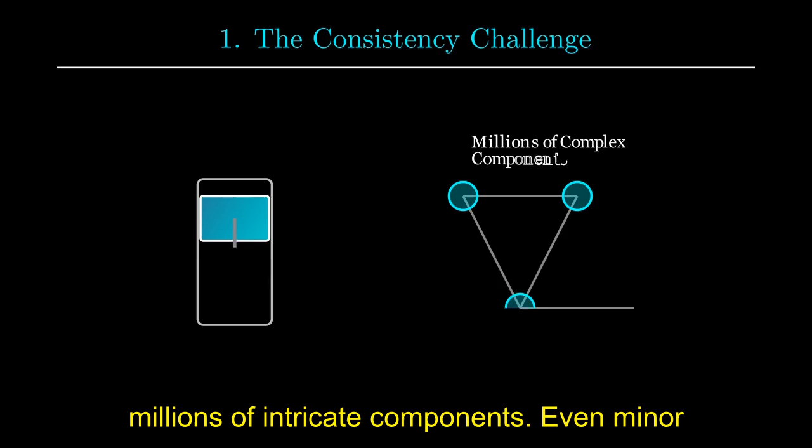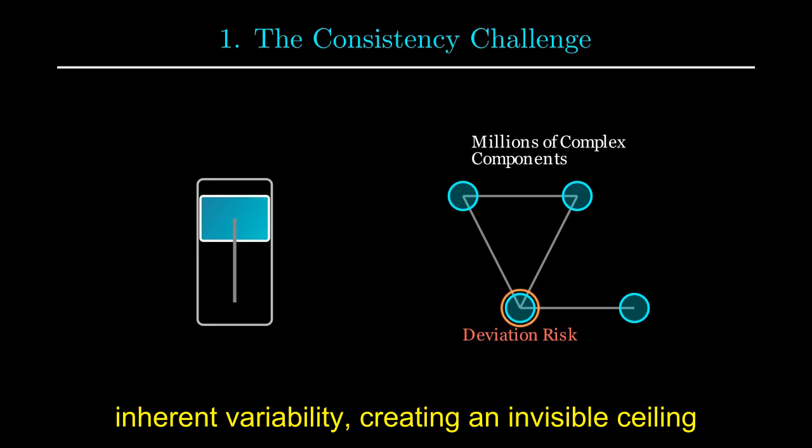Every engine built today faces a fundamental challenge: achieving absolute consistency across millions of intricate components. Even minor deviations can lead to reduced performance, premature wear, and costly failures. The traditional methods, reliant on human inspection and fixed automation, often struggle to eliminate this inherent variability, creating an invisible ceiling on quality and lifespan.

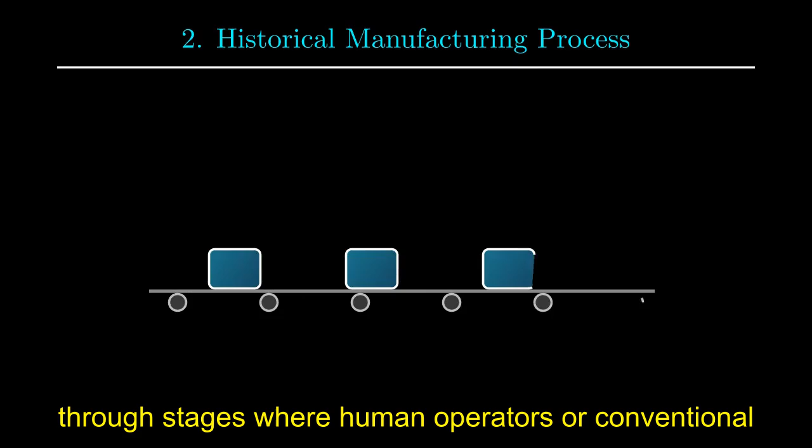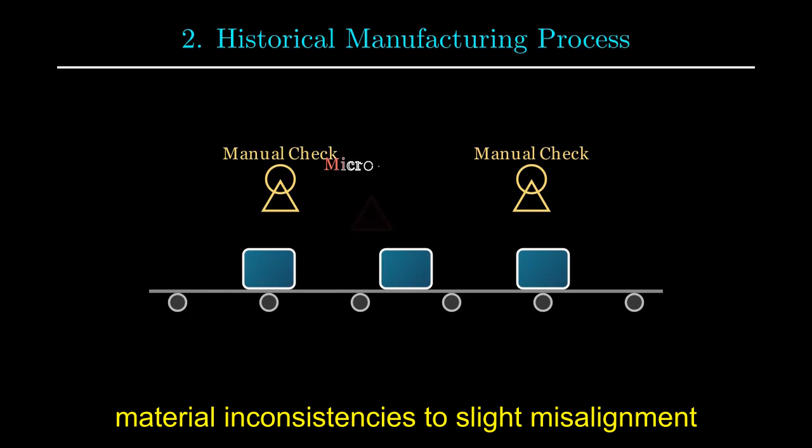Historically, engine manufacturing involved a series of discrete, human-supervised steps. Assembly lines moved parts through stages where human operators or conventional robots performed repetitive tasks. This system, while effective for mass production, introduced potential points of failure, from microscopic material inconsistencies to slight misalignment during assembly. Manual quality checks, even with trained eyes, could not capture every anomaly. This limitation created a demand for a new paradigm.

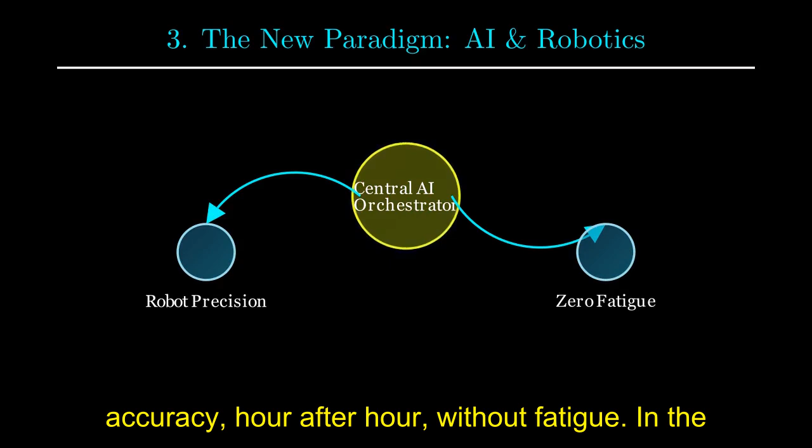Artificial intelligence and advanced robotics are now converging to transform this landscape. These systems offer precision and consistency unattainable by human hands, executing tasks with unyielding accuracy, hour after hour, without fatigue. In the design phase, generative AI algorithms explore vast solution spaces for engine components. Engineers define constraints such as material properties, weight targets, and performance metrics. The AI then synthesizes thousands of design iterations, often yielding geometries beyond human intuition.

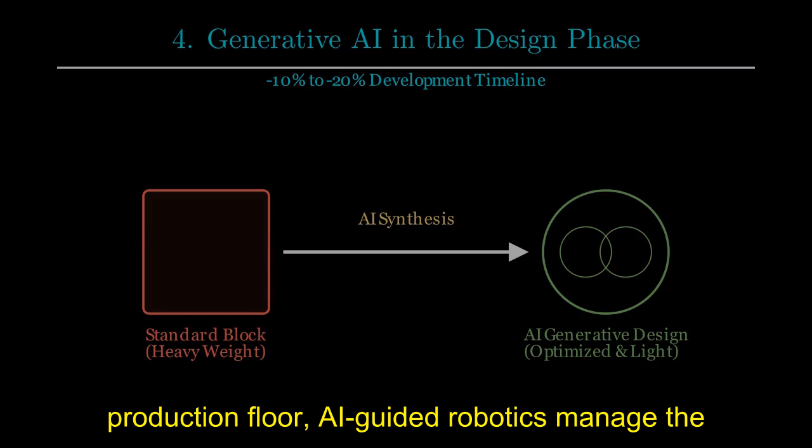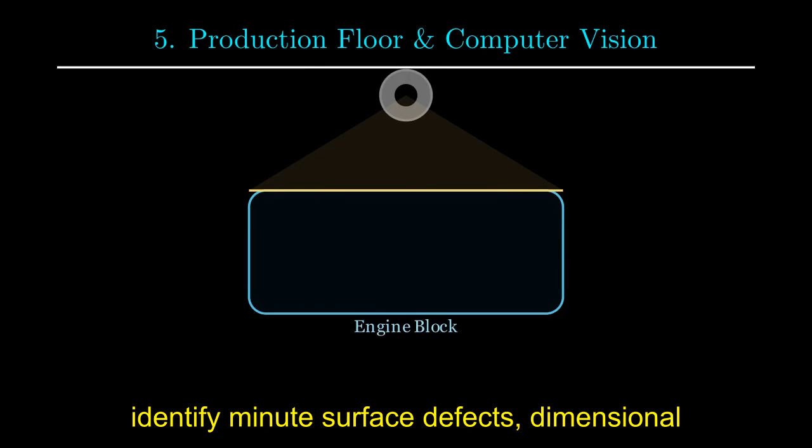This process optimizes structural integrity while minimizing mass, as seen in how BMW and Ford utilized AI to design lighter, more fuel-efficient engine parts. These AI-driven approaches can reduce part development timelines by 10 to 20%. On the production floor, AI-guided robotics manage the precise assembly of complex engine blocks. Advanced computer vision systems, powered by deep learning, perform instantaneous quality inspections. They identify minute surface defects, dimensional variances, or assembly inconsistencies with a detection rate up to 90% higher than manual inspection. This real-time analysis allows for immediate corrective action, preventing defects from progressing down the line.

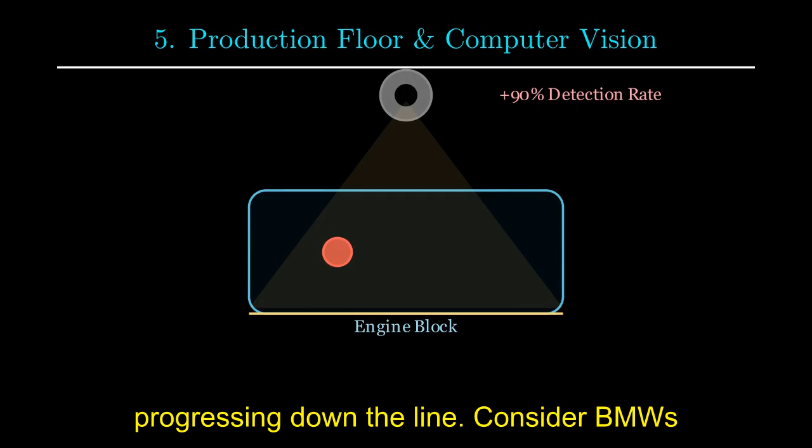Consider BMW's custom-developed AI platform, AIQX. This system integrates cameras and sensors on conveyor belts to automate quality processes, providing immediate feedback to production line personnel. Similarly, Ford employs intelligent robots that learn and optimize assembly sequences, determining the most efficient methods for component integration. Audi also leverages AI-driven visual inspection to ensure the quality of welded joints in vehicle assembly.

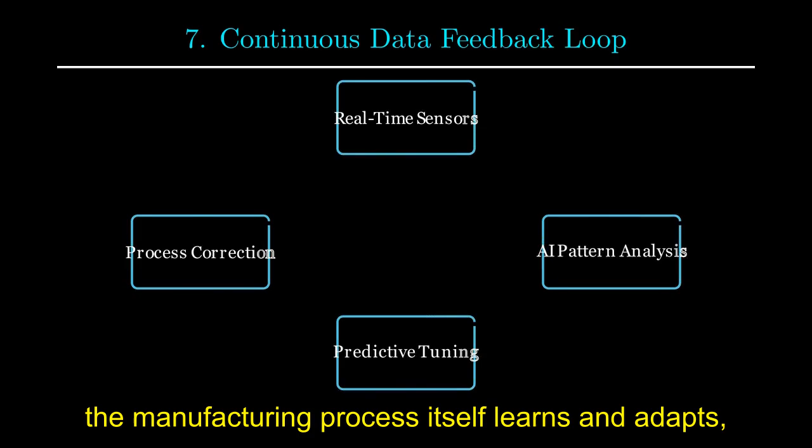This continuous data feedback loop is critical. AI systems analyze vast amounts of real-time sensor data from machinery, identifying subtle patterns and anomalies indicative of potential issues. This allows for predictive quality orchestration, where the manufacturing process itself learns and adapts, constantly refining parameters to enhance output consistency and reduce variation. However, integrating such sophisticated AI systems is not without its complexities.

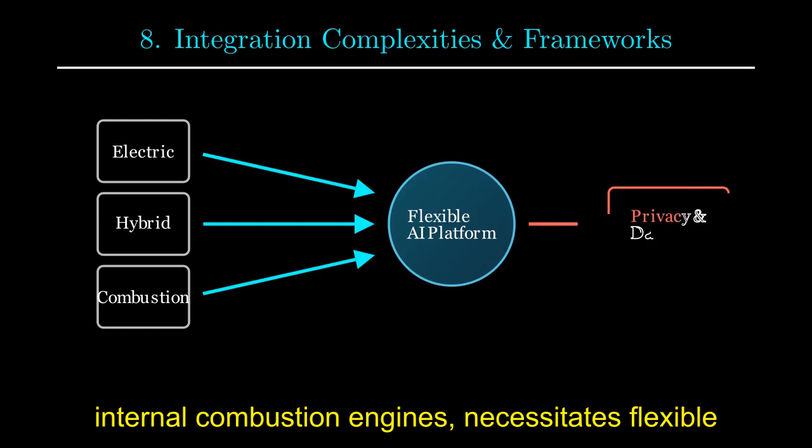Initial implementation demands significant investment and robust data infrastructure. Furthermore, manufacturers must navigate the challenges of unifying data from disparate systems and addressing potential data privacy concerns. The dynamic landscape of diverse powertrains, including electric, hybrid, and internal combustion engines, necessitates flexible and adaptable AI frameworks.

The role of human labor simultaneously undergoes a transformation. Rather than replacing workers entirely, AI redeploys human expertise. Personnel transition from repetitive manual tasks to overseeing AI systems, programming new operations, performing maintenance, and focusing on higher-level strategic and creative functions. Collaborative robots, or cobots, work alongside humans, assisting with physically demanding or complex tasks.

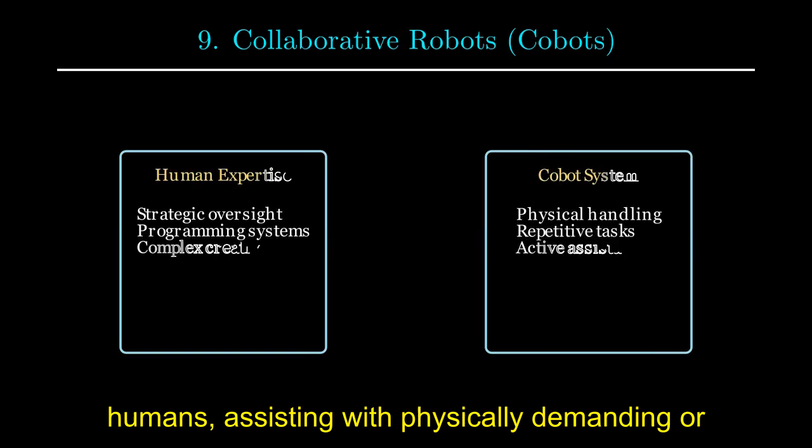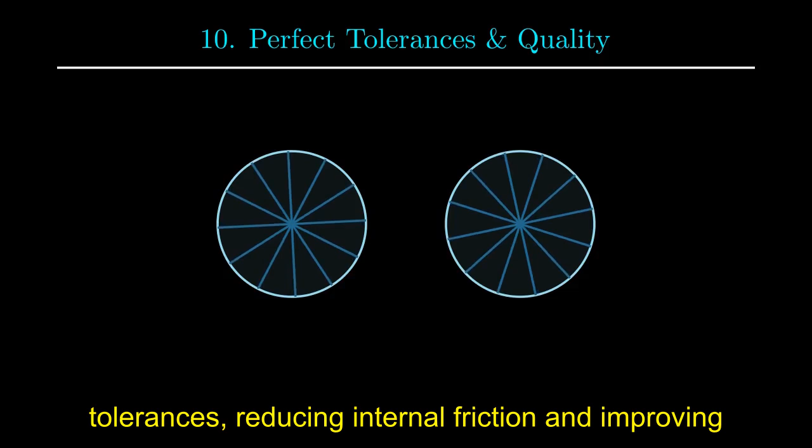The direct consequence is an engine with an unprecedented level of quality and performance consistency. Parts fit with exact tolerances, reducing internal friction and improving thermodynamic efficiency. The probability of early component failure diminishes, contributing to a longer operational lifespan for the engine.

The economic benefits extend throughout the lifecycle. Predictive maintenance, driven by AI, reduces unplanned equipment downtime by as much as 67% and cuts overall maintenance costs by up to 45%. This proactive approach minimizes waste, optimizes inventory, and increases production throughput. Considering these advancements, a critical question emerges.

If your next vehicle does not incorporate engines built with this level of AI precision, what performance and reliability advantages are you conceding? Vehicles with conventionally manufactured engines may not achieve the same calibrated efficiency or demonstrate the same longevity. Predictive maintenance, a key benefit of AI in manufacturing, can significantly extend a vehicle's lifespan and proactively reduce expensive repairs.

Looking forward, AI is paving the way for fully self-optimizing factories. Digital twin technology, a virtual replica of the physical production line, allows AI to simulate and test new manufacturing scenarios and design iterations without disrupting actual production. This also drives sustainable practices by optimizing energy consumption and minimizing material waste.

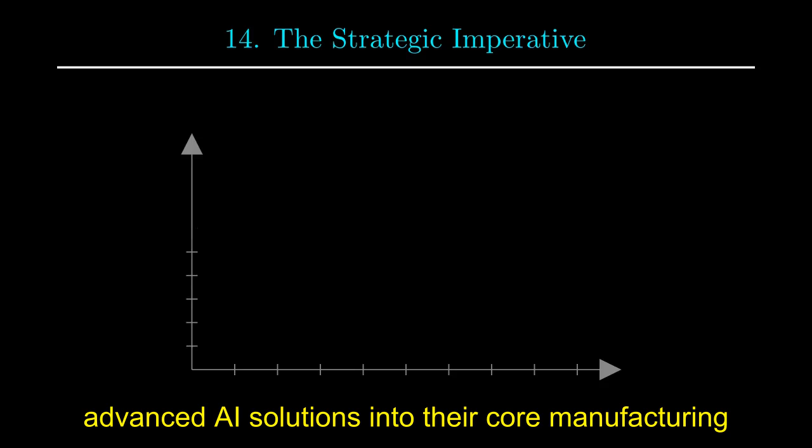For automotive manufacturers, embracing these AI-driven methodologies is no longer merely an option, it is a strategic imperative. Companies that integrate advanced AI solutions into their core manufacturing processes are gaining a distinct competitive edge in innovation, efficiency, and product reliability. Those that delay adoption risk obsolescence in a rapidly evolving market demanding superior engineering.

The shift in engine manufacturing is fundamental and irreversible. AI has established a new benchmark for automotive excellence, impacting every vehicle that leaves the assembly line. The question is not if AI will build your next car, but rather, what capabilities your next car will lack if it isn't.